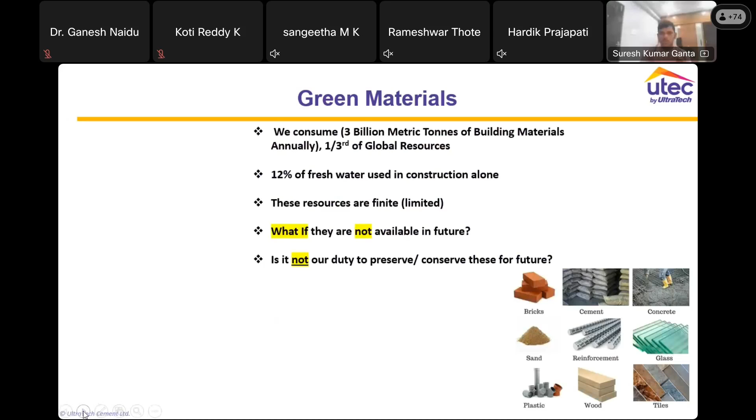So it is our duty to preserve all these. How can we preserve? Again, the same thing. Green materials means, for example, if you are constructing a house in Andhra Pradesh, maybe in Guntur or Prakasam, but you are getting granite or marble from Rajasthan, it may not be called a green material, because of the distance the material is traveling, and all the sources involved in that, like energy, fuel cost, and carbon emissions from that fuel. These things should also be looked at, and whether we are getting it from within 300 or 400 kilometers.

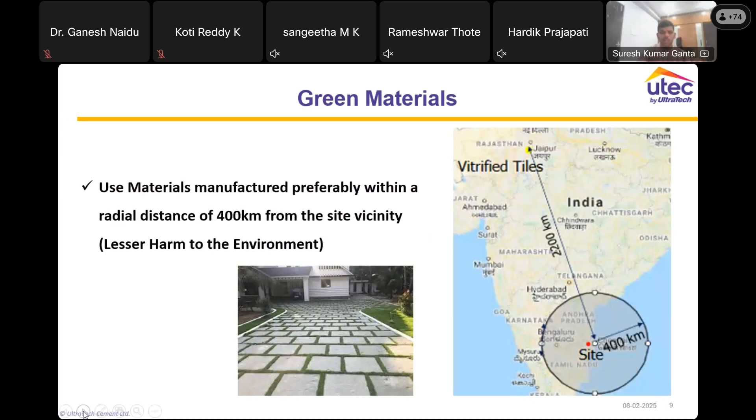For example, you are getting Kadapa stone from Kadapa, which will be a green material for you because it's not far than 200 or 300 kilometers. So these are the things we should look into first. The building materials we are getting should be nearby only, meaning the local material should be used. And in the manufacturing process, from the raw materials to the manufacturing process, usage, disposal, reuse, and recycle process of that material, everything should be taken care of to get the green certification, to get into green building materials.

Let us see what is green certification. Green Pro certification is nothing but when we produce in a green, sustainable way, the manufacturer will get a certificate for that, given by IGBC and the Confederation of Indian Industry. So by seeing this Green Pro logo, we can tell that is a green material.

Other materials like bricks, AAC blocks are green materials. I will tell you why these AAC blocks are green material. Red brick, we are making it from mud, that means clay, so again, as I said, we are using natural resources. But in AAC, most of the material is fly ash.

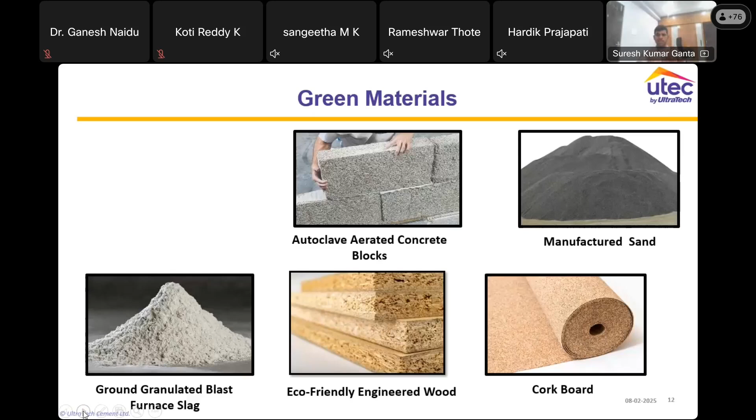Corkboard is similar, made from waste cork. These are materials like blended cement. When they use fly ash or GGBS, they are called green materials and get certification. Ready mix concrete also has triple blend and double blend - double blend means fly ash and cement, triple blend means GGBS, fly ash and cement, or sometimes slag and cement in double blend. So all ready mix concretes nowadays are green materials.

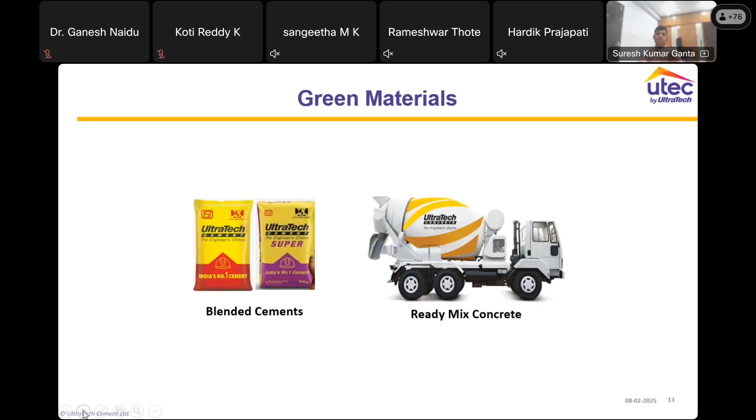To reduce water usage, they are using admixtures, which also saves water. Generally people think ready mix concrete uses more water, but as civil engineers we should know it's not about adding more water, because more water causes segregation. So they use admixtures instead, which give the required slump, that means workability, and by that they save most of the water.

AAC blocks - Ultratech is one of the manufacturers of AAC blocks. As I already told, these are much lighter than normal bricks, even lighter than water. The density of AAC block is 600 to 700 kg per cubic meter, and it insulates in some ways, like it can be used as cover of the building, that means the envelope of the building, which I'll discuss later.

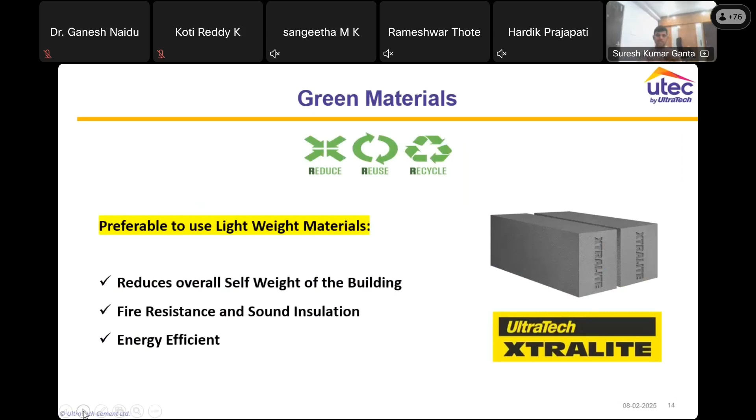All these dry mix materials nowadays are like a simple Maggi type of thing - they just get a bag, mix some water, and use it like anything. By this they save energy, that means manpower, reduce wastage, and water is also measured and limited when mixed into these things. These are sustainable products.

This is the first topic, we've discussed some of these materials. Let us go into the next thing, which is water harvesting. Rainwater harvesting is again a topic, but water harvesting means not only rainwater, we can do all the things with all the water.

As I told earlier, we have only 2.5% fresh water in the world, on Mother Earth. All the remaining is salt water, and this 2.5% is also partly in glaciers, some is groundwater, and some is surface water. So what can we do? Only 0.4% of water is currently available to us without taking much energy, because getting surface water and groundwater requires energy.

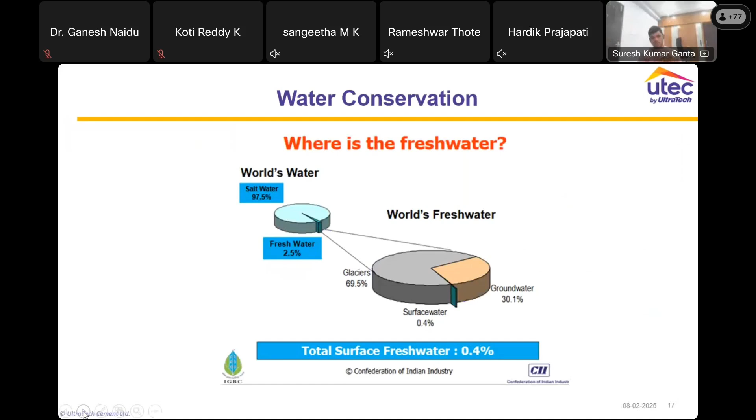Let me discuss the construction aspect later, but at least in our regular house, we are already using this water - what are the uses of water? Bathing 35%, flushing 20%, dishwashing 21%, laundry 14%, gardening 6%, cooking 3%, drinking 1%.

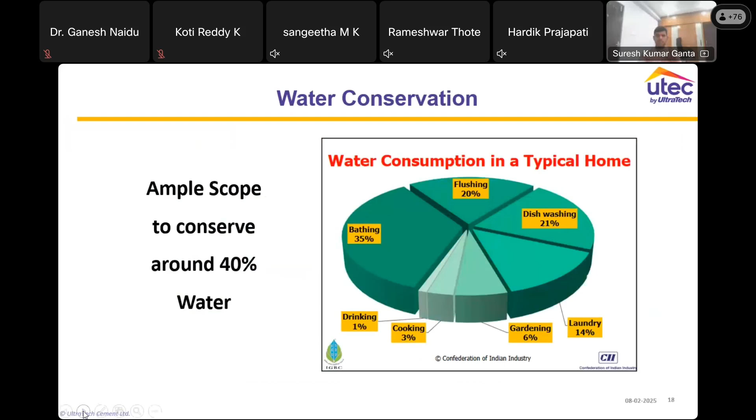This is a typical home consumption of water. So here, what can we do, how can we harvest this water? Again, the 3R strategy. One, reduce - how to reduce the usage of water without compromising our comfortability. I'm not saying we should be very limited, like taking only 1 liter per day for drinking. We should not compromise comfortability, but at the same time, how can we reduce usage with modern technology.

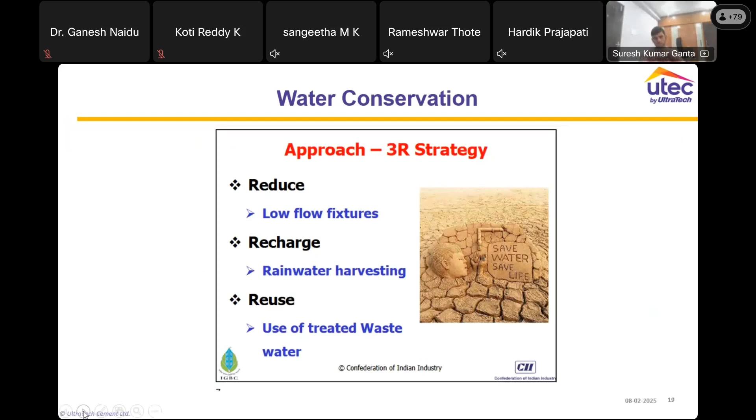Second thing, recharge - how we can recharge the rainwater or the water which we are leaving outside. That is one thing. Third thing, reuse - reuse means retreating the water, water treatment, and reuse of the wastewater. How we can reuse it, this is the third thing. So let us see what we can do to reduce the water.

Some of the times we may go with things like water metering automatically. Some of the bores, you all know that when you switch on your bore hose or motor pump, automatically some water will flow out of your tank, and only then will you realize and go switch off that motor. But nowadays automatic controllers are there, meaning your motor can be switched on when the tank is going to be empty, or it will automatically switch off when it is full. So these small automation things we can do.

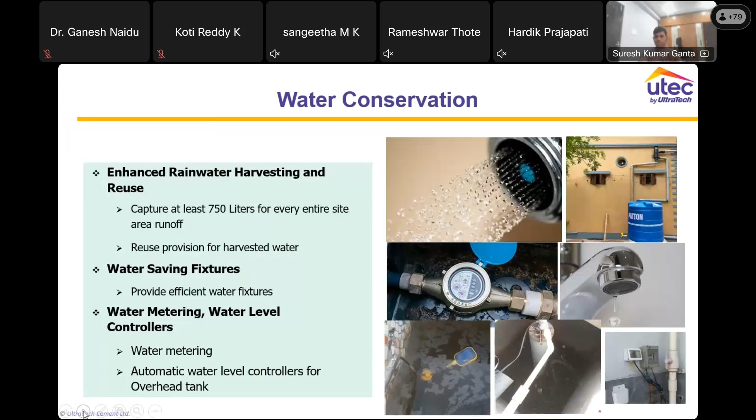How much can you reduce? Normal tap gives 15 liters per minute. That means if you switch on the tap and just leave it there, you get 15 liters out of the tap per minute. But if you just fix an aerator, it will give you around 3 to 5 liters only, which is 70 to 80% less water. But flow won't be compromised, and pressure will still be high. So you need not go for normal taps.

I will tell you why. The usage of water is very limited at that time. For example, if you are cleaning vessels, you don't need 15 liters per minute of water. 3 or 4 liters per minute is more than enough. If you are brushing, you don't need 15 liters per minute to brush. These are all things we can take care of, and we can save water.

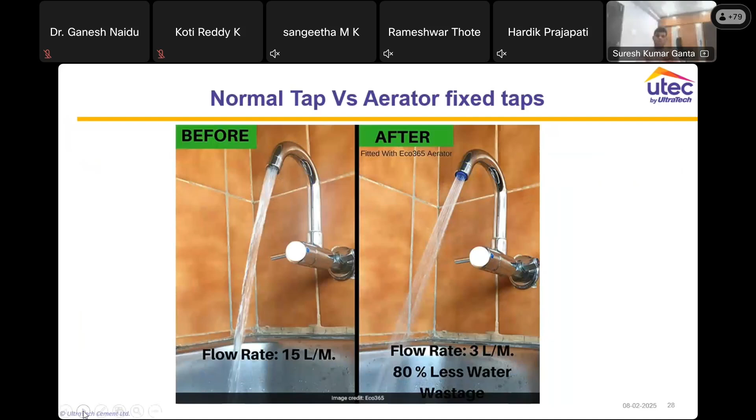Just imagine yourself or me brushing for a minute or two. Brushing time is generally 2 minutes, and we automatically switch on our tap for brushing time. In these 2 minutes, you get 30 liters of water with a normal tap. If you go for an aerator tap, you get only 6 liters in these 2 minutes. That means you are saving almost 80% of the water - 24 liters just for brushing. Imagine if there are 4 people in your house, 24 into 4 per day - how much water you can save. These are the things we should take care of.

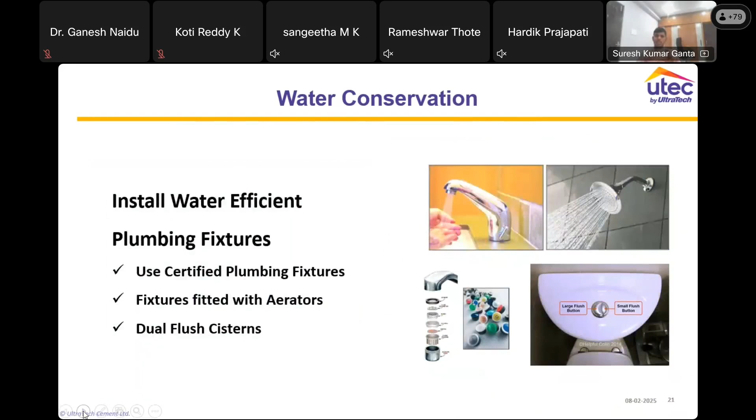At the same time, look at showers and all these things. Even in flushing, most of the time people don't know why there are two buttons. So you should try to know or get information about these two buttons - where we can use both buttons, or only use the small button.

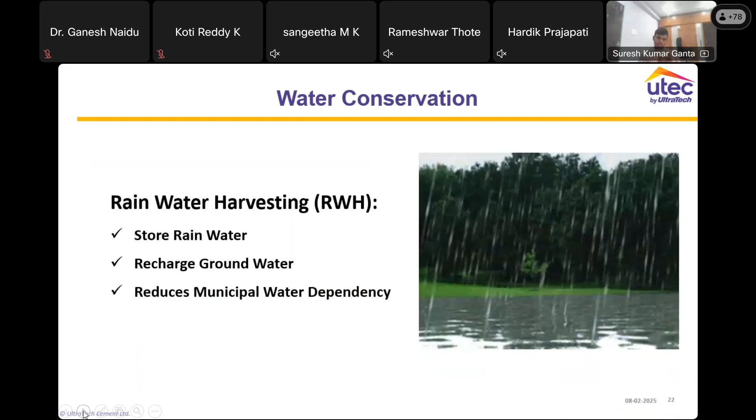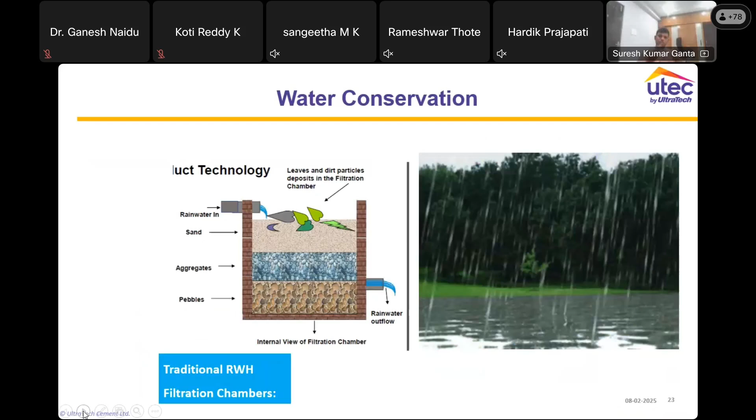At the same time, rainwater harvesting. Rainwater harvesting is nothing but storing the water which we get from rain. How can we do this? This is a conventional method of rainwater harvesting. We can fix up a rainwater harvesting pit, where there is a mesh on top, sand, fine aggregate, coarse aggregate, and some pebbles. The water will be purified and groundwater will be recharged. This is the conventional, traditional type.

So now what can we do? These are the latest methods. Recently some courts have changed it. Some members think it should be around the borewell - good, it's not a bad thing. You can have a rainwater harvesting pit around the borewell also. With this, the same mesh thing again, and charcoal will be there in this. This is another way to recharge our groundwater or bore water levels.

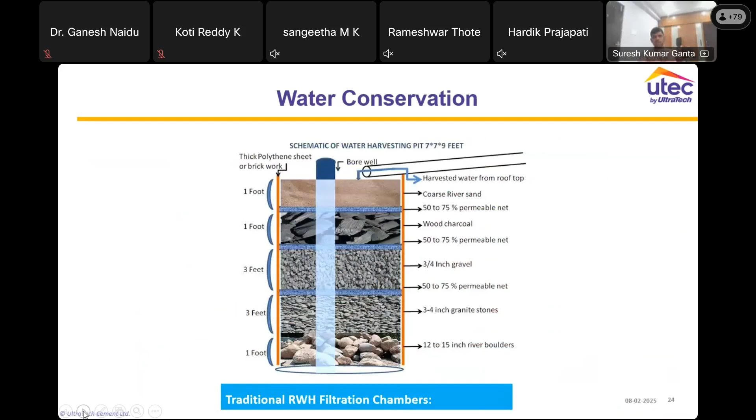But do you ever think we can reuse this water immediately? Yes, we can. And what about flat roofs? Now we get all roof water because the outlet pipe is there. That outlet pipe, we get it and connect it directly to the rainwater harvesting pit, and some groundwater recharge is going on. That's very good, no doubt about it. But what about sloped roofs?

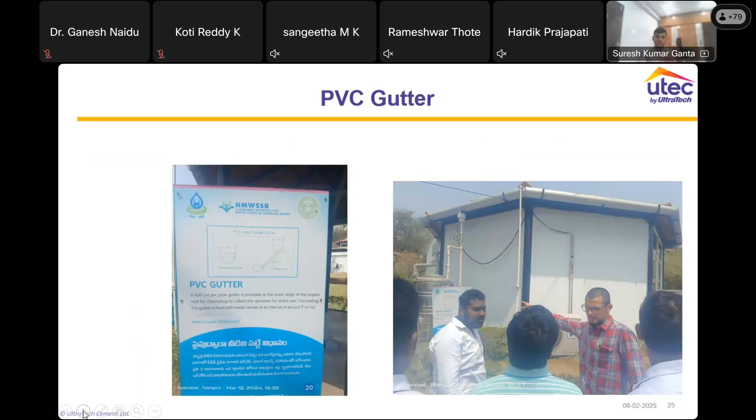Sloped roofs - this picture I got from Hyderabad municipal corporation, where there's a 15 acre park especially for rainwater harvesting. They are showing how we can do rainwater harvesting by creating PVC and aluminum gutters for sloped roofs, collecting all the water into tanks. This is one of the tanks, with PVC gutters and Sintex tanks. This is also one way to collect rainwater.

So the latest thing we can do - because people don't have the patience to wait for groundwater to be recharged and bore levels to increase before getting benefits. No one will listen. That's why you'll hardly find rainwater harvesting pits in AP or India.

So nowadays, using technology, some companies like Rainy and WISY got patents for a filter which doesn't need any electricity, because electricity comes with energy cost. So only gravity filtration happens in these systems. What it does exactly is maintenance-free and gravity-based - it collects all the water from the rainwater catchment area.

That means the sloped roof or the roof of your building, and it will filter the water. Almost 80 to 90% you will get as treated water, and the waste water will go drained out. The treated water you can send to your sump, that means your underground water tank. From there you can again take that water to your overhead tank. It's very easy to fit and very economical also.

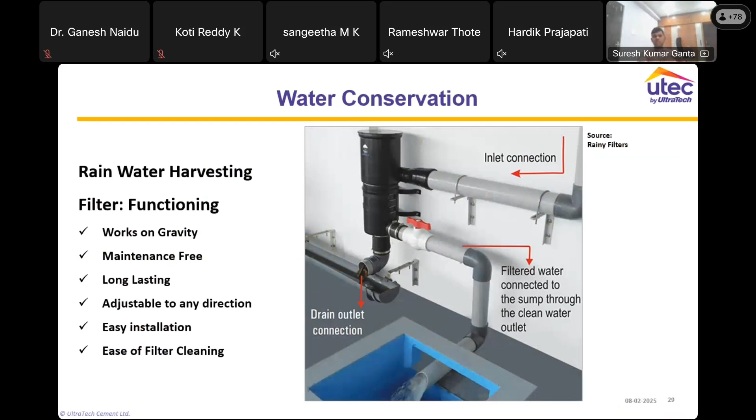So this is the filtration - how the filtration will happen and all these things. Some filters will be there inside, and it will purely work on gravity.

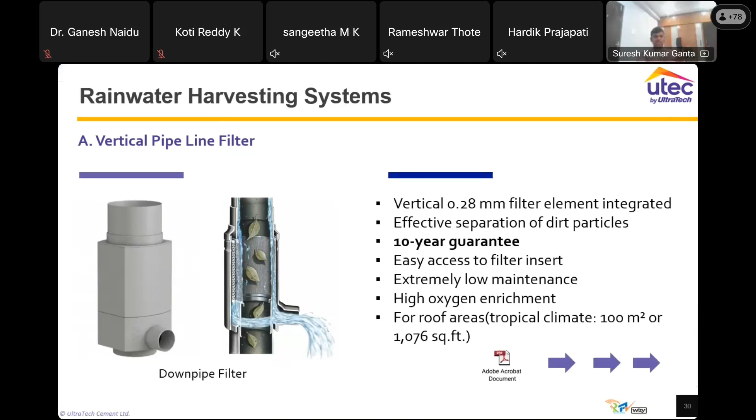But in our India, we go by numbers only. That means if we say this is good and good things will happen to you, no one will listen. But we should prove it with some numbers. For example, last time when I gave this presentation in areas like Rajahmundry or East Godavari, I took this from the website - even the State Development Planning Society, where you get all the rainwater information, that means rainfall information.

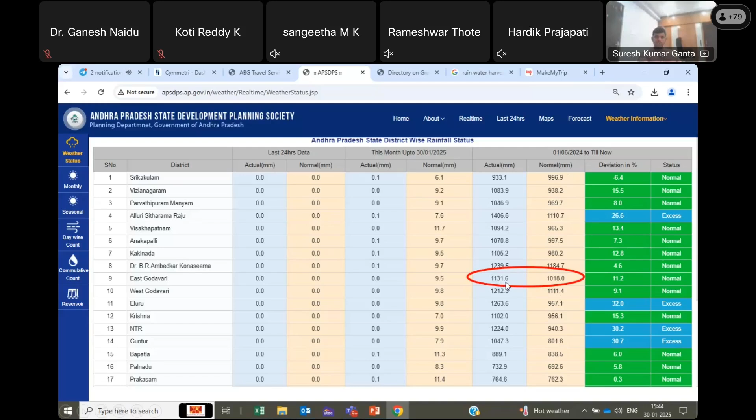With this information, just see the actual rainfall - from April, June 24 till now it is 1131. So with this 1131, if I'm having a 1,000 square foot house in East Godavari district, what will happen to me if I'm saving all the water? You know it's roughly 10.76 square feet, we can take it as 10 square feet, which is 100 square meters of catchment area, and rainfall is 1132.

With 0.95 efficiency, that means 95% of the water is enough for me. The remaining 5% the slab will absorb, the roof will absorb, some of the walls will absorb the water - okay, let it be. With this 95% efficiency, I will get around 1,07,540 liters.

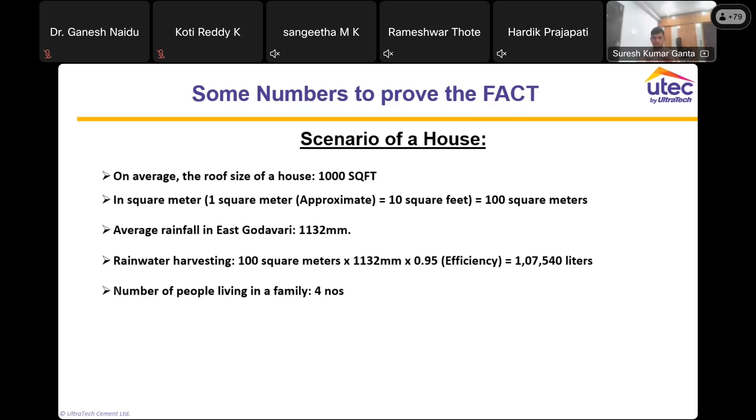Just imagine how I can use this water if I am filtering it immediately. In my family there are four members typically, and as per our norms and CPWD, central building commission standards, 135 liters per person is required per day. So for my family I require 540 liters per day, and with all this water I can get up to 6 months 19 days - 199 days. The rainfall I'm calculating just from June. Just imagine, 6 months 19 days.

Of course if you take it for the entire year, half of the year you need not switch on your bore. That means you are saving electricity and saving groundwater, all these things. Just imagine how we can save with rainwater.

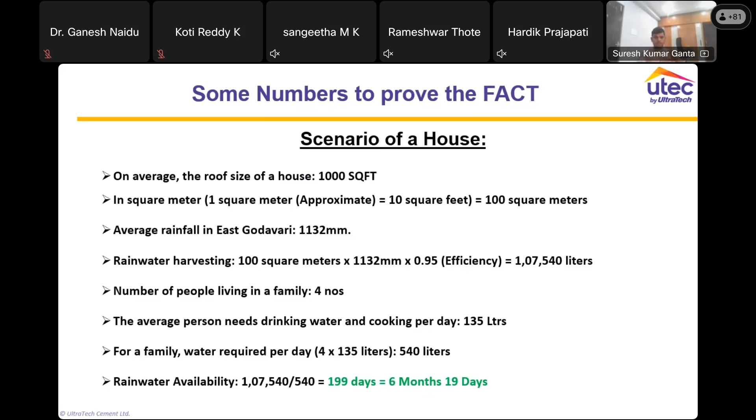So this is about water. I request all of you to think twice when you are utilizing or using water, or when you are showering more than an hour, or more than 30 minutes, 20 minutes. Just think of the water - how you are utilizing it and how you will get it back.

So let us go to our third part, that means green energy. Green energy is nothing but the energy which we are using right now. If you see the climatic zone of India, most areas will be warm - like our conditions too, Vijayawada, Krishna, and all these districts, Guntur district, it will be warm and humid.

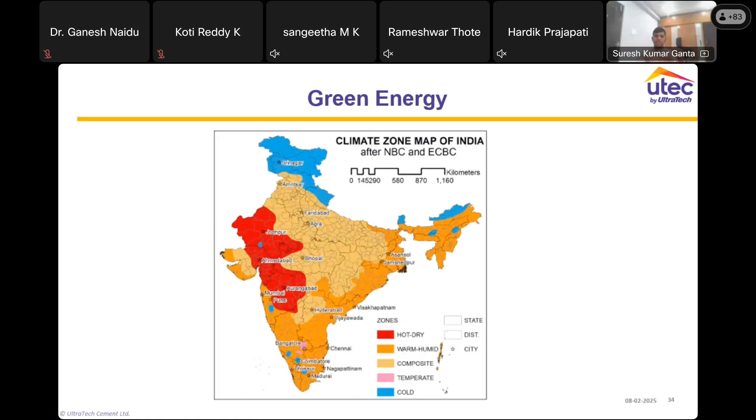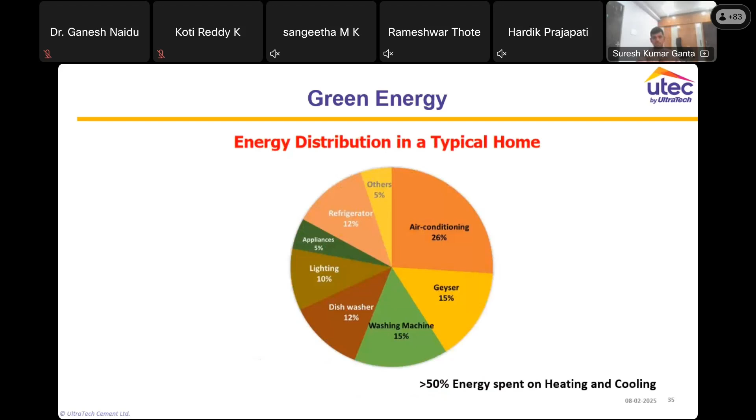So I'm not saying that we should not use that, we should not have this, but how can we reduce the usage? That's where we can look into reducing without compromising our comfortability.

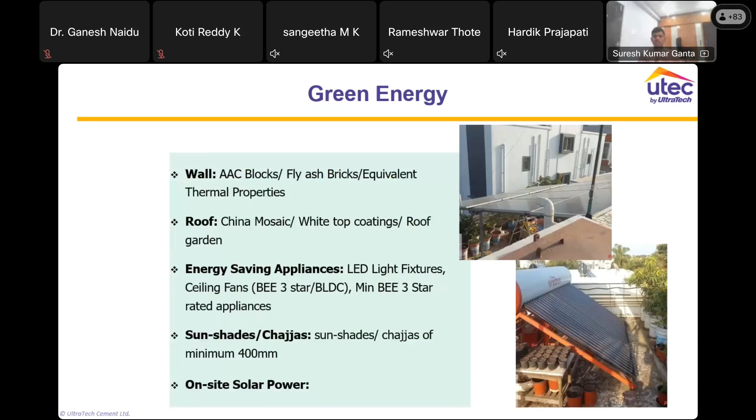So a few of the things we can do with our building envelope - let me show you again. The envelope, the outer cover of the building, should have things like AAC blocks which can reduce the heat up to 3 to 8%. It will act like a heat barrier.

At the same time, when we are using windows, we should take care which type we are using - whether double glazed or triple glazed - so that it lets in lighting but not heat. This also we should take care of.

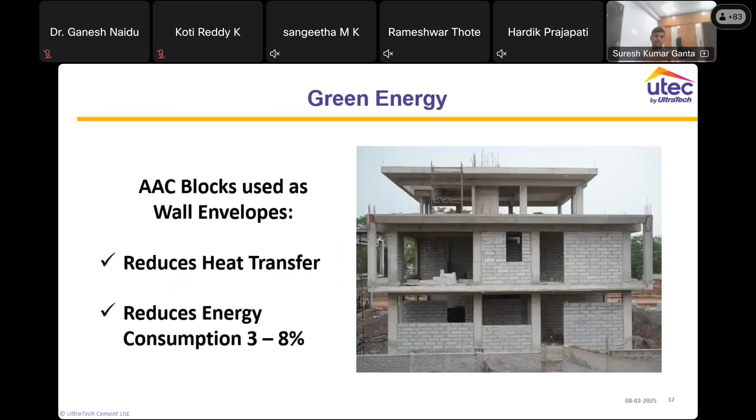From the top side of the building, we should see whether we can go for green gardening or SRI paints, which have a high solar reflective index. This means you won't absorb heat - it gets reflected back, so the roof won't absorb much heat, and it controls almost 10 degrees compared to the outside temperature. Some products have proven to decrease temperature by 10 degrees centigrade.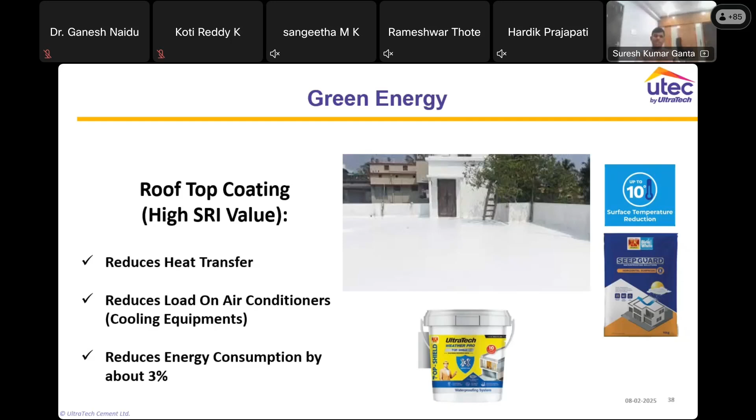These are the roof gardens where we can reduce some of the heat, because plantation or greenery gives you cool relief from the heat. We can also go with China mosaic tiles on top of the roof. All these things can reduce the heat from the outside and the top side.

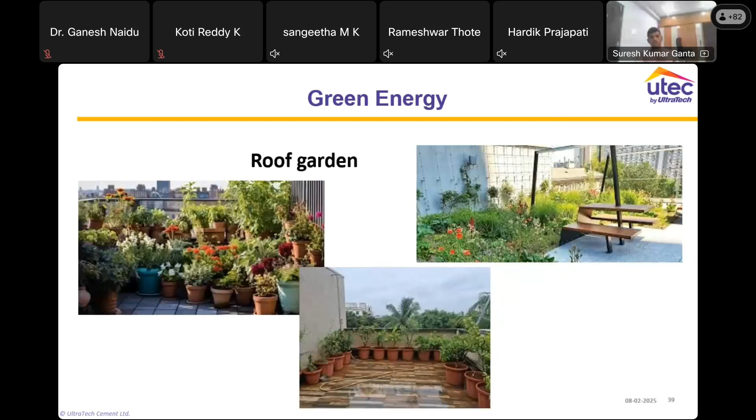So we are just trying to reduce the heat. Also, we should try to reduce the power - this is about how we can reduce the electricity consumption.

Star rating - most of the times we won't see what star rating is and how it's useful. But nowadays I think you must all be aware of the BEE star rating. 5 star means less electricity consumption, while 3 star or 2 star means a little bit more electricity consumption.

So we should take care of this, and at minimum I urge you, I suggest you to take 4 or 5-star appliances all the time.

I can even show you how we save on costing. If you take a 5-star AC versus a 3-star AC, the saving with the 5-star will be much more - you will save around 3,000 rupees per annum. This is the cost differentiation - it may look a little less, but the annual cost saving for a 1.5 ton unit is around 15,794 comparing 0-star and 5-star.

Of course we won't take any 0-star, but even between 3-star to 5-star there is again a gap. So this is how we can reduce our usage too.

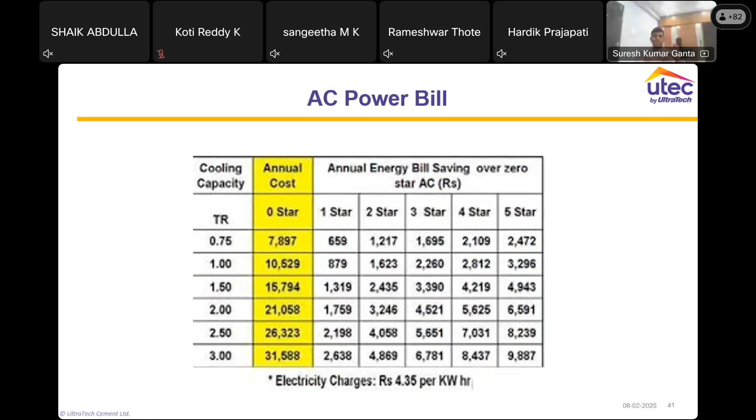Now we should think of green power, where we can regenerate or generate the power. Solar is the best option where we can get power from natural resources like sunlight. But just imagine if you don't have sunlight - how are we developing power energy right now? With coal. Coal is definitely a limited source, you all know that.

Or hydropower - hydropower again needs water, and we are already suffering to get the required water. Most summers, cities like Hyderabad and Bangalore are already draining out and don't have water. So nowadays this has become a big problem for them too.

So we should try to change the generation to green power. How? By fixing solar panels on your home, which will give you free power. Of course, in this, most people will ask - what about my investment? I will show you and discuss that. Nowadays even most schemes are available for solar. And in solar, first of all, I would like to tell you about the process of solar.

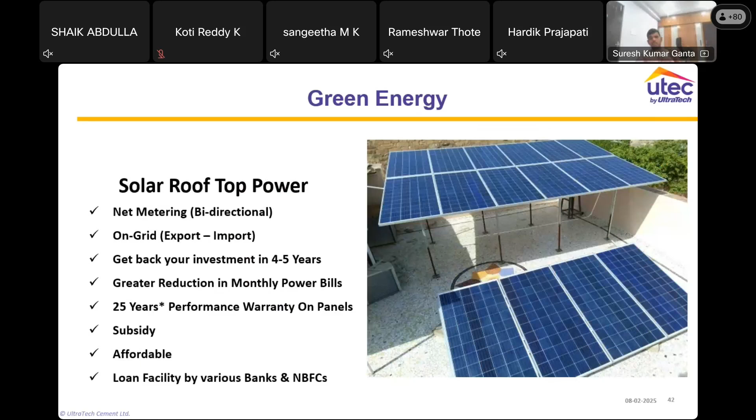So for a small house, with power units of 350 units, that means you are getting a power bill of 3,500 rupees. How much can you have? You can have around 3 kilowatt solar power on your roof. This 3 kilowatts will cost you around 1.8 lakhs after subsidy, maybe 1.5 to 1.8 lakhs.

In this 1.8 lakhs, imagine you are saving 3,500 rupees per month. Just calculate 1,80,000 divided by 3,500 divided by 12. In 4.5 years you are getting all the money back. But if you calculate with interest included, it might be 5 years.

But all the solar panels and inverters we get will have 25 years warranty. The rest of the 20 years, you are almost generating 8.4 lakhs rupees worth of power.

And we all know that today's 3,500 rupees is not equal to 3,500 rupees in the future. That means the rupee value is decreasing, and with inflation and all, it may not be the same tomorrow. The unit cost of power today may not be the same in 2028 or 2029. It will definitely differ.

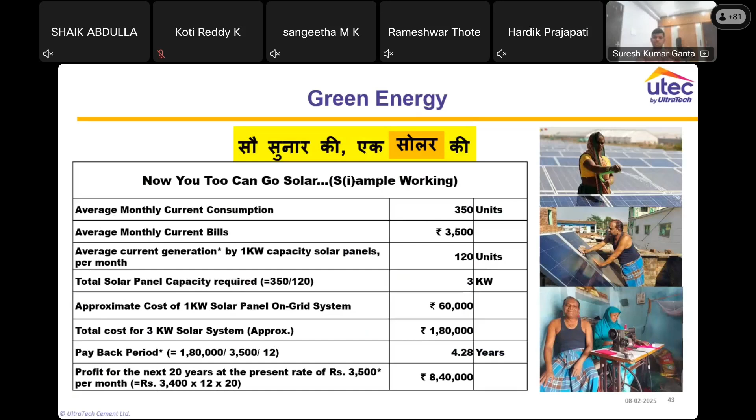My final topic will be green homes. That means we have discussed all these things for existing homes. But while constructing a new house, how can we treat it as a green home, how can we make it a green certified home?

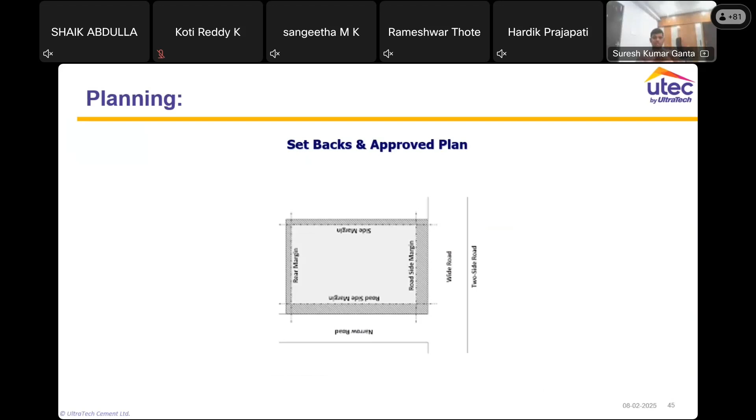The first requirement will be setbacks as per the local authority or approved plan. Setbacks means nowadays we are just increasing all the areas, our plinth area is almost equal to the border wall of the neighboring one. That should not be the case. We should give some setbacks, then only the air circulation or wind circulation will happen. That is the first priority.

Second, while planning only, we should plan all the cross ventilation and dark spaces like underground cellars. We can use some sun pipes or openings with glass, so that we get lighting during the day at least, so we can reduce the light electricity consumption.

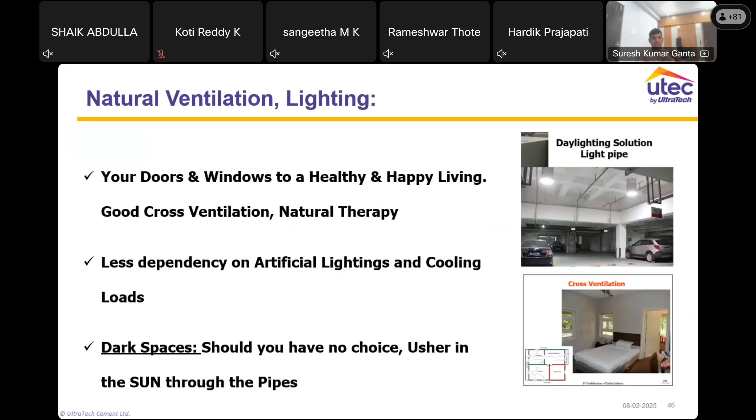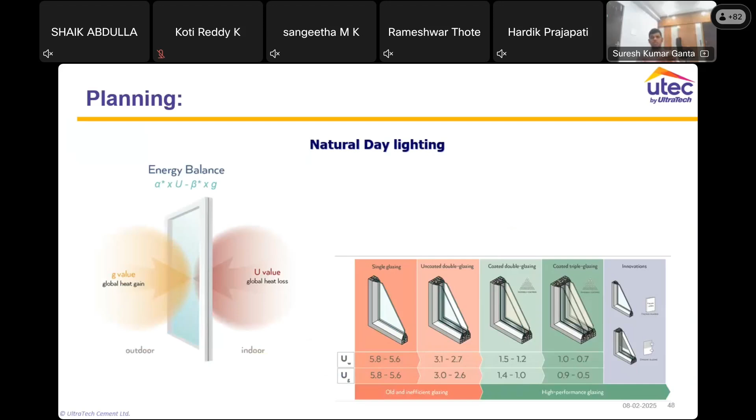This is the cross ventilation, meaning cross windows or cross doors should be there. And as I discussed earlier, the window glass we use should not be limited to single glaze, like double glazing or triple glazing, because it depends on the heat we get inside, but not the light. In the vice versa, we should use such glass where we get light inside the room but not the heat. That is the best case.

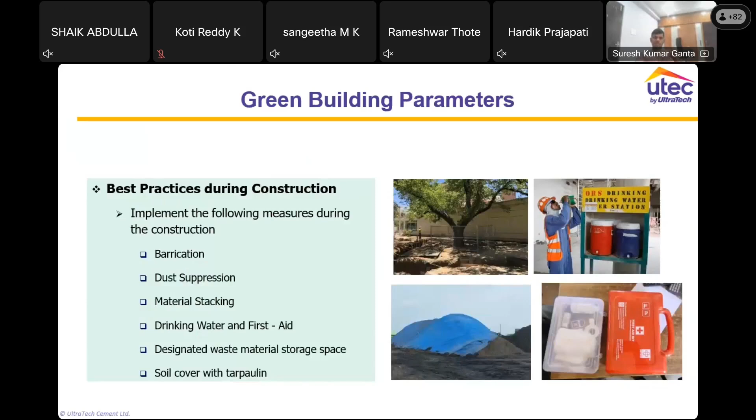Some green building parameters, barricades should be there, dust suppression, and all these will be there. One important thing I would like to discuss, once you are preparing the site, during site preparation, the top soil of the site, 150 to 200 of the top soil, most of the sites now are going for farmlands, so this top soil is more fertile.

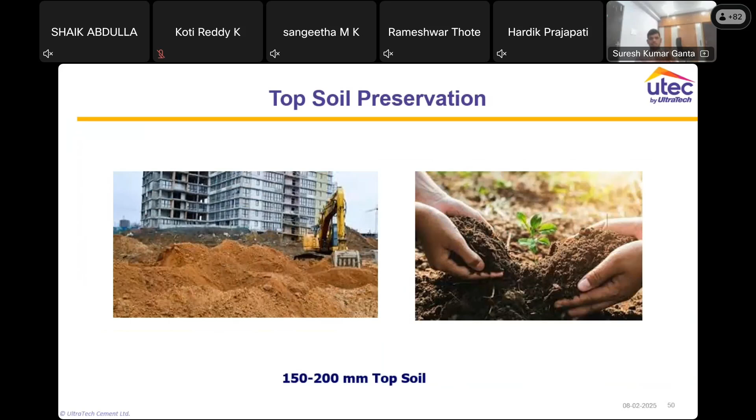This soil we can store somewhere, or we can donate it to farmers or nurseries. If we use it for backfilling or something else, the soil will take a minimum of 25 years to become fertile again. Fertile soil is also limited on earth, so this soil can be donated, or at least used for your own greenery or plantation purpose.

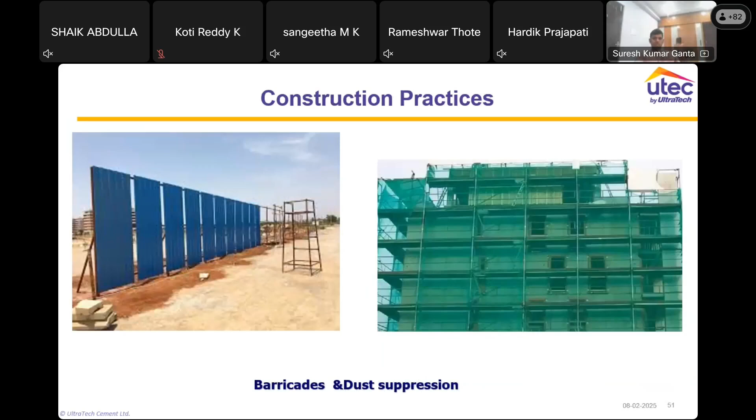When we go for construction, it should not be harmful to others, so dust suppression or barricades should be there. Nowadays electric vehicles are more prominent, so shade for the vehicle and charging points should be planned beforehand.

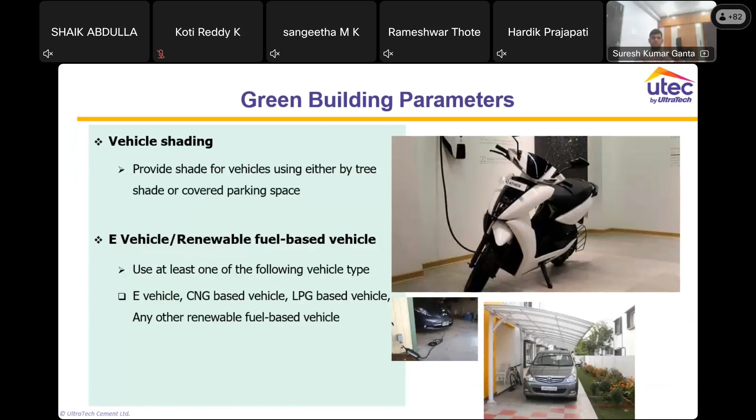Most of the things we discuss now are about sustainability and organic living, because the pesticides used in plantations or the fruits we get from the outside market, we are not sure whether they are organic or not. Most of those are inorganic.

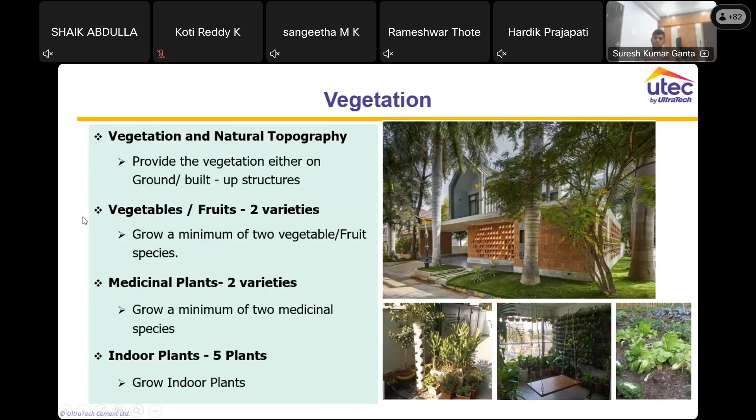So what we can do in our own premises, if you have the place, is grow 2 to 3 vegetable varieties and 2 to 3 fruit varieties so we can get organic produce. But even if you are not doing all this, some of the indoor plants recommended by NASA should be there in your house.

These 10 plants are a must in your house to develop oxygen, because nowadays all the rooms are closed and we are living in closed societies getting very little oxygen, since no parks are there. Earlier there used to be so many parks where we used to go walking, but day by day lifestyles are changing and we are unable to go outside.

So these 10 plants will develop oxygen in your house. These are purely indoor plants and you can get sufficient oxygen. For example, date palm trees should be 5 plants per head, minimum 3 feet height, and rubber plants or peace lily you can have 3 to 4 plants per head. These plants inside your house will give air purification and oxygen.

A few small things: dry and wet waste separation should be there, and all these things should be in place. These are some of the things already discussed.

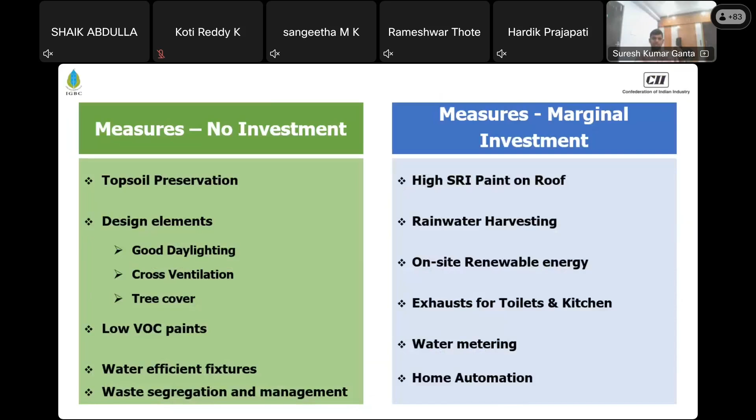IGBC also provides certification to houses where we try to build these green homes - one is Nest and one is Nest Plus. These are the requirements for these certifications.

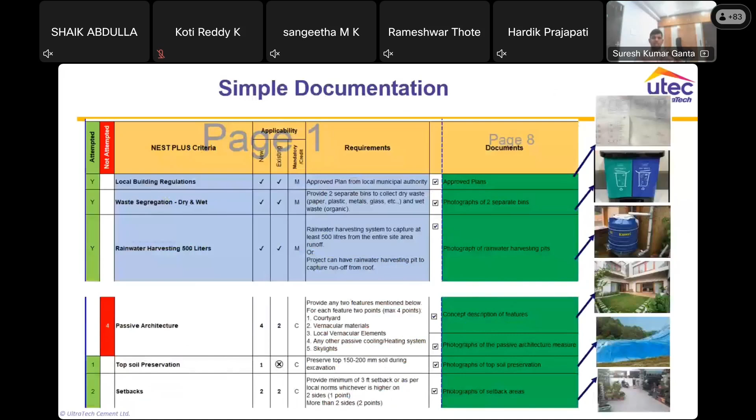Ultratech is also now giving sustainable solutions through UTEC, like designing of the house, roof gardens, solar power energy, and rainwater harvesting filters. All these things are now available with Ultratech also.

They are not paying even a single rupee of the power bill. They are not paying even 1 rupee of the water bill. They are growing all their vegetables on their roof only, and not getting any vegetable from outside. This building is definitely a sustainable building, we can say.

So this is the thing, friends. When we think of sustainability, we should take care of all these things. Some of the IGBC AP accredited professionals are there like me, who will definitely help you build some green houses. If you have any doubts, you can ask me.